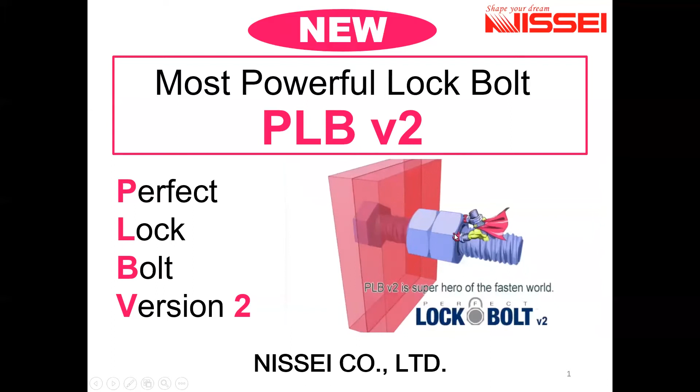Today, I would like to introduce our new lock bolt called the Perfect Lock Bolt V2 technology. The PLB V2, which I will explain here, has been developed by us for more than 15 years. By the end of this presentation, you will want to use it. My talk will be divided into 3 parts.

First of all, I'd like to give you some basic information about PLB V2 with examples of principal benefits. Then, I'm going to talk about the technical explanation of PLB V2. You will know that PLB V2 is the best lock bolt, demonstrating high locking and usability performance. Finally, I'm going to explain the PLB V2 business outline.

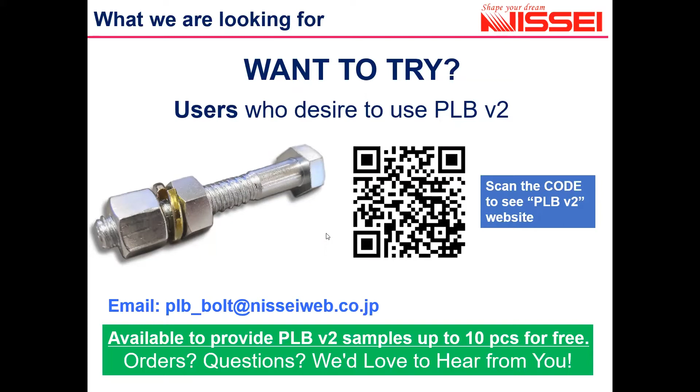Firstly, I explain the target we are looking for. We are looking for users who are interested in testing and demonstrating PLB V2. The PLB V2 project is still in its beginning period, having just started in September of last year. As I'll explain later, we are confident that PLB V2 is an anti-loosening product that meets all users' requirements. However, it still lacks recognition, and there are few examples of actual use.

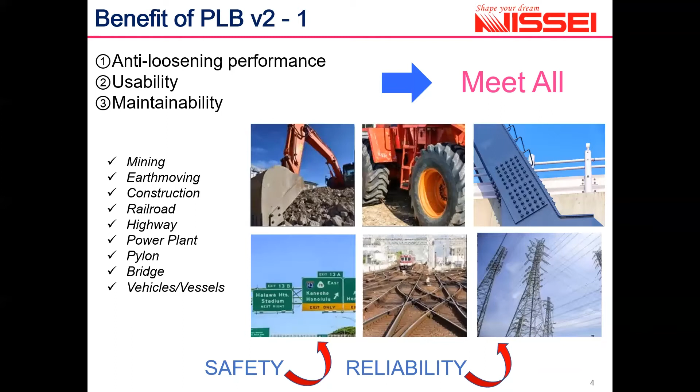The application range of PLB V2 is very wide, and we believe that it is especially suitable for areas subject to high vibration and requiring frequent retightening. The use of PLB V2 contributes to safety and reliability.

Next, I explain the actual usage of PLB V2 in Japan. PLB V2 is used for the parts of the preheater of a lime furnace rotary kiln in a mine. In the conventional method, a nut is inserted through a bolt. The nut and part are welded together to fix the part.

The bolts are made of heat-resistant stainless steel, used in high-temperature environments. The problem is that small gaps are created between the parts during the welding process, and harmful gases produced during the lime burning process enter the gaps. As a result, the bolt became thin and corroded, and the user had trouble with loosening 6 months after setting, and the bolts had to be cut to remove them, which required many costs.

The user has used the PLB V2 for 6 months now and it has not loosened at all. With the conventional method, loosening occurred in the same situation. It is also very important to realize that the PLB V2 material is cheaper and has less heat resistance than the material used in the conventional method. In summary, the user can reduce not only labor cost, but also material cost.

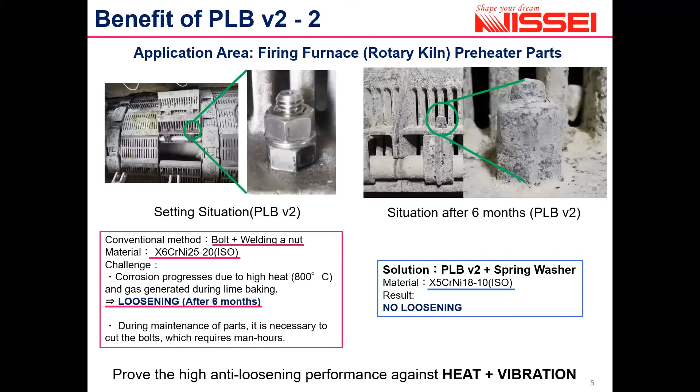I explained the principle of PLB V2. The PLB V2 has been designed to address the issues associated with self-loosening of a bolted joint. By design, the PLB V2 consists of a dual-thread screw shaft and 2 nuts of different thread pitches. The first, or big ring nut, on the shaft is a multiple thread nut. The outer, or secondary nut, on the shaft is a single thread nut.

When the PLB V2 is subjected to a self-loosening force in any form, such as vibration, as with double nut assembly, a self-loosening force initializes loosening with the inner nut. With the PLB V2, the inner nut advance is blocked by the slower moving outer nut. The mechanical lock is the secret to the PLB V2 locking design. No other fastener system in the world can make this offer. Most other self-loosening kits use friction for their locking function despite its uncertainty. PLB V2 locks the nut with a mechanical locking system that prevents them from loosening.

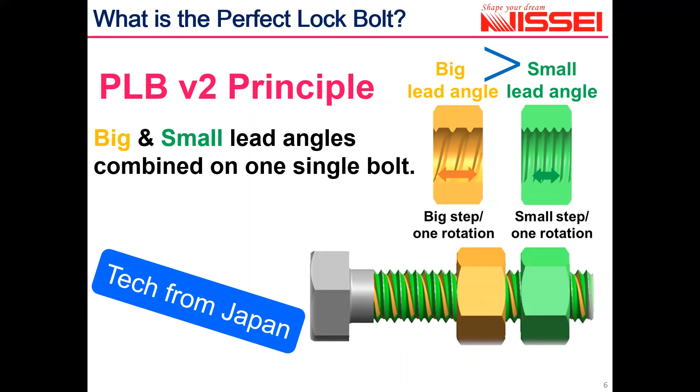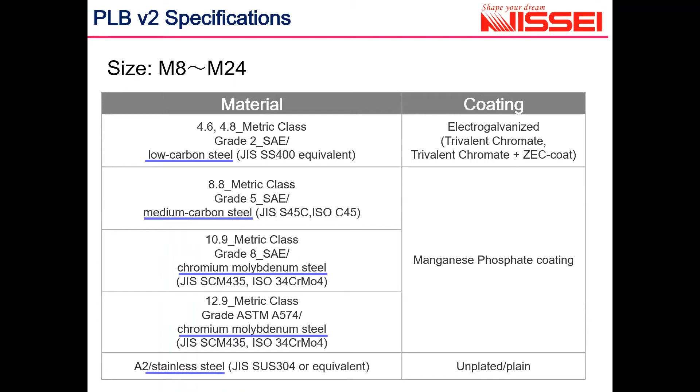This section explains the standard size, materials, and surface treatment available for PLB V2. The size range is M8 to M24, and the standard materials and hardness listed in the table can be used, for example, low carbon steel, medium carbon steel, chromium molybdenum steel, and stainless steel. PLB V2 doesn't apply to hot dip galvanizing because it has not been tested yet. However, ZEC-coat, which has equivalent corrosion resistance, can be provided for areas requiring corrosion resistance. We will consider materials not listed in the above table if requested. As a basic principle, if thread rolling process is possible, then PLB V2 can be made from that material.

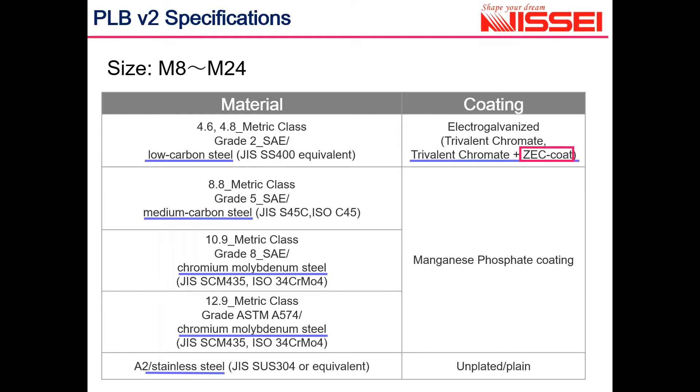From this part, I explain the technical information on PLB V2. Firstly, I explain the self-locking performance of PLB V2 and other locking kits. We prepared a video to evaluate the self-locking performance by using the Junker vibration test. I would be glad to see it.

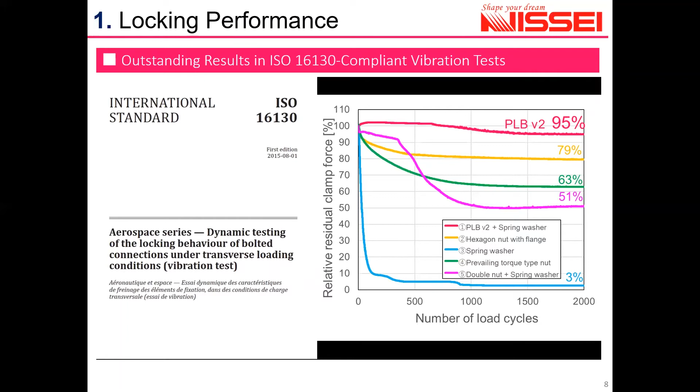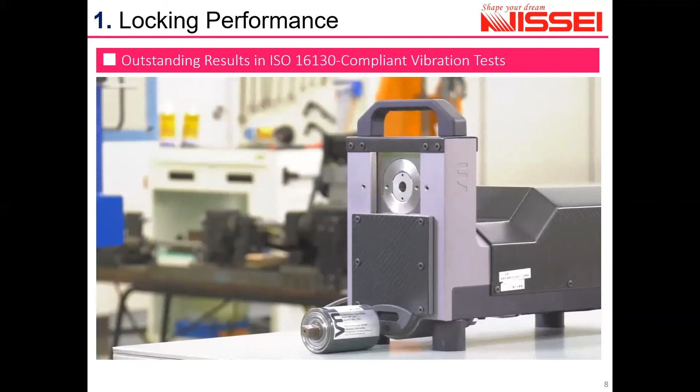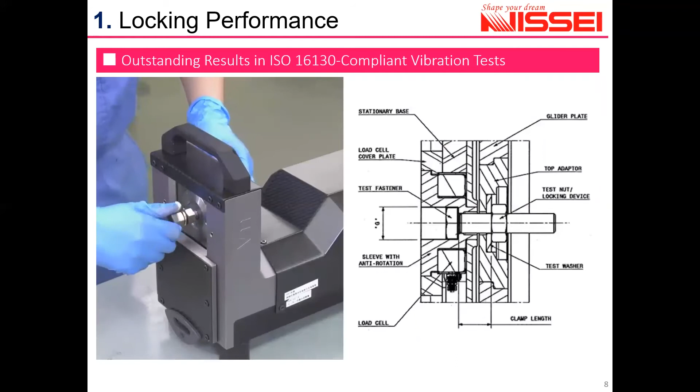A little explanation of performance testing. The Junker test, which conforms to ISO 16130 standards, validated PLB V2's claim to anti-loosening capability. It is the strictest test available. We used it to measure PLB V2's clamp performance.

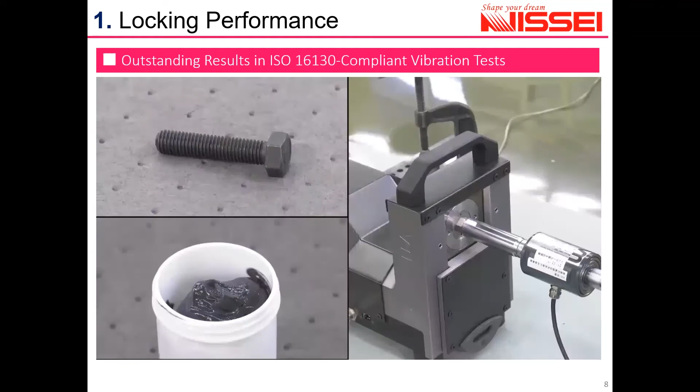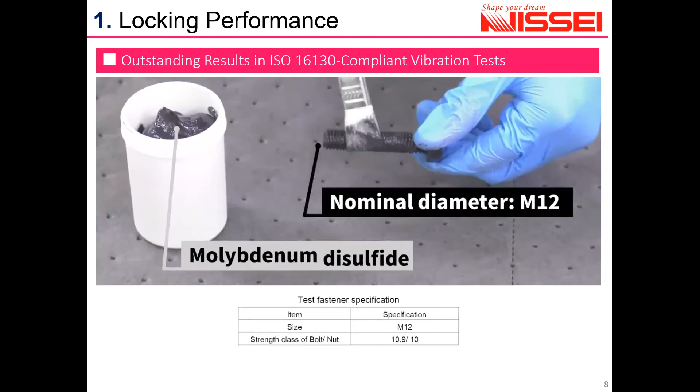Here you can see the actual test. Molybdenum grease is used to lubricate a bolt specimen with a nominal diameter M12, and the nuts are tightened. For easy observation, the bolt and nuts are marked. Then the bolt is subjected to 2,000 vibrations.

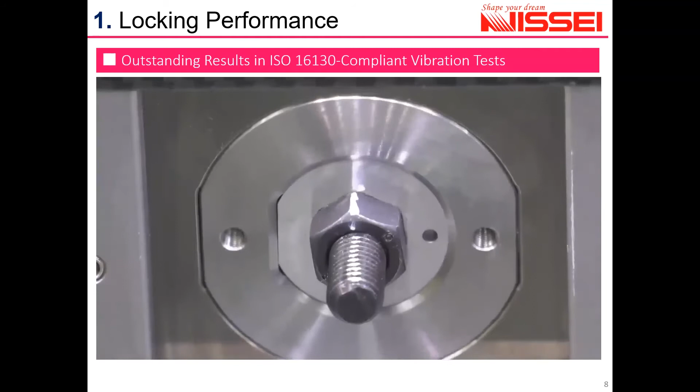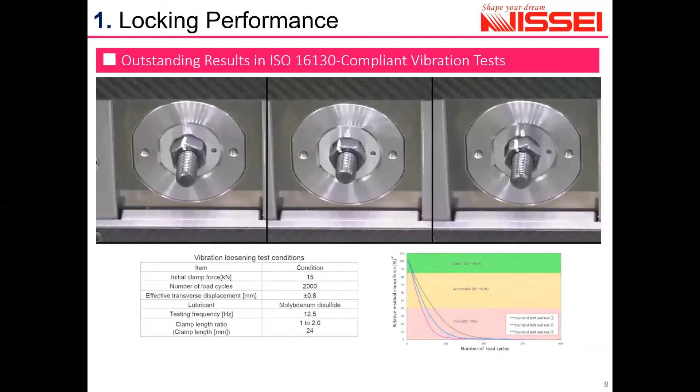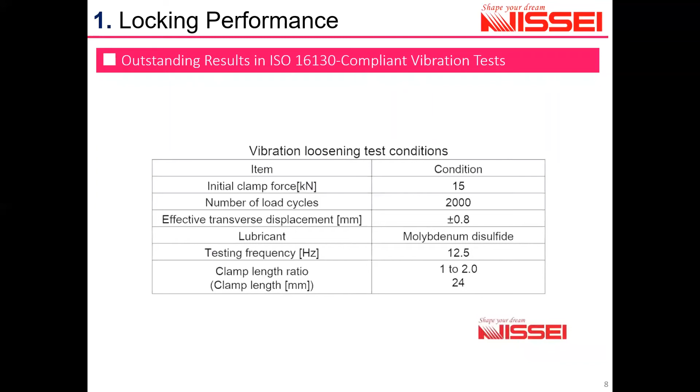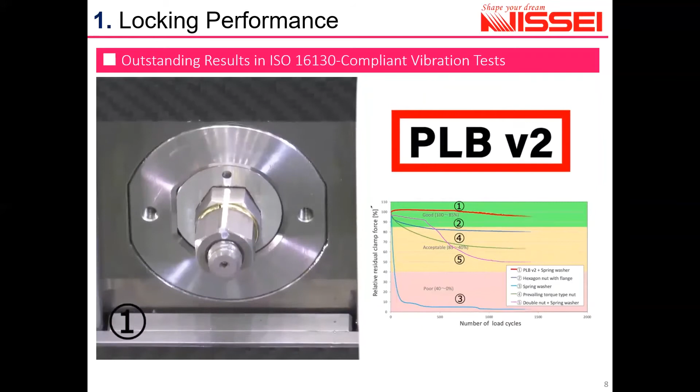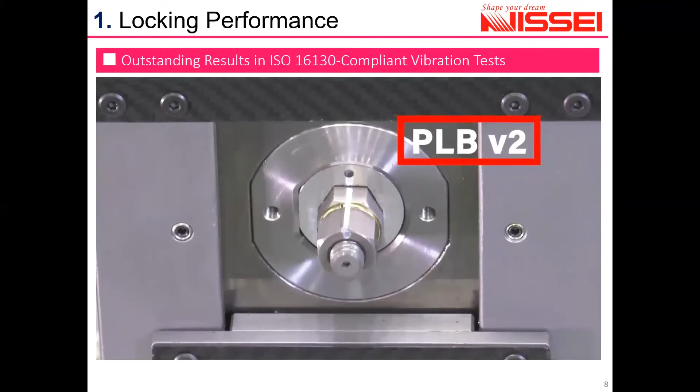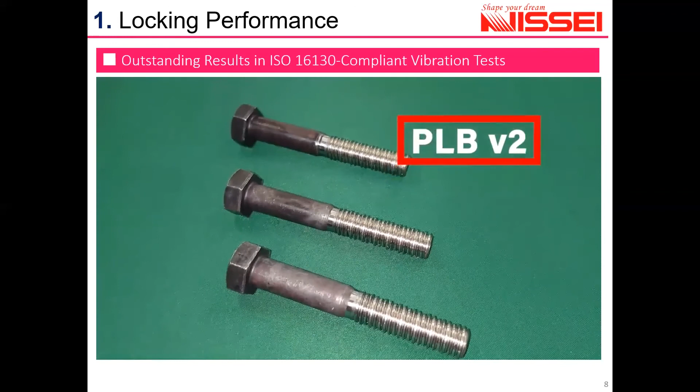Only PLB V2 attained the highest level of anti-loosening capability by ISO rules. This powerful level of anti-loosening capability delivers confidence. It delivers safety.

To evaluate the usability performance of PLB V2, I will explain the difference from the standard double nut. The standard double nut bolt has high self-locking performance, but it requires 3 steps for tightening, so time is needed. The tightening process has 3 steps: first, tightening the inner nut; next, tightening the outer nut; at last, holding the outer nut stationary and tightening the inner nut by rotating in reverse. The reversing process is not easy and requires a skilled technician to perform.

For the PLB V2, the inner nut rotates as it is being tightened because the inner nut thread is larger than the outer. This means the tightening process is complete by simply applying the specified tightening torque to the outer nut only. No reverse seating is necessary.

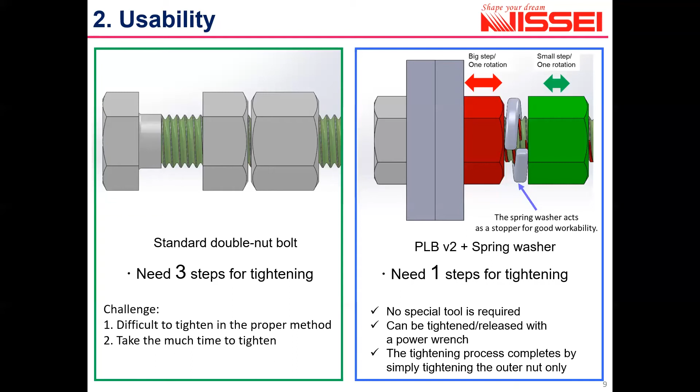In addition, the user cannot use some conventional self-locking products with a power tool for tightening and releasing. However, PLB V2 can be tightened and released with a power tool. In actual use, we recommend using a spring washer between the inner and outer nuts. The spring washer acts as a stopper and prevents the inner and outer nuts from turning together, enabling anyone to handle them easily and correctly. In conclusion, PLB V2 has superior usability performance compared to a standard double nut.

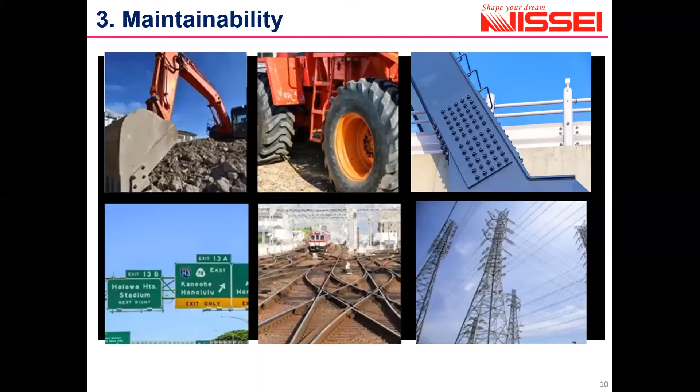Next, I explain the test to evaluate the maintenance performance. The purpose is to evaluate the combined results of lock and usability performance essential to users. We prepared a video to evaluate the self-locking performance by using the Junker vibration test. I will be glad to see it.

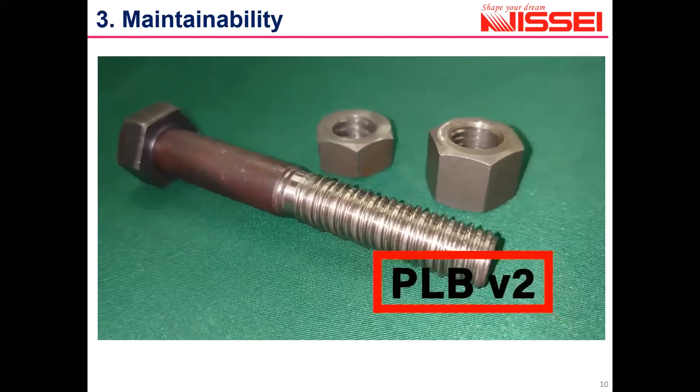Nissei has developed the anti-loosening bolt PLB V2. Its easy handling and unrivaled anti-loosening properties, plus lower maintenance costs, have been verified.

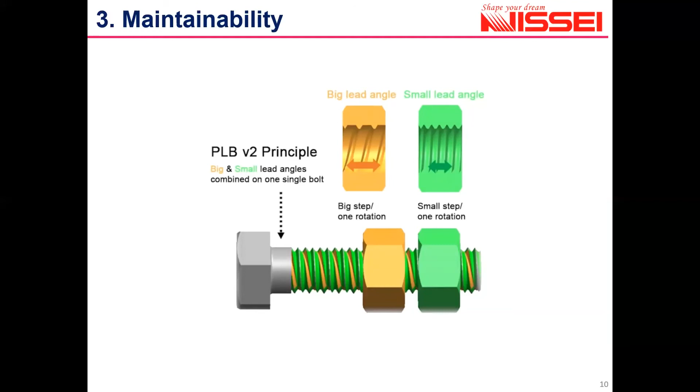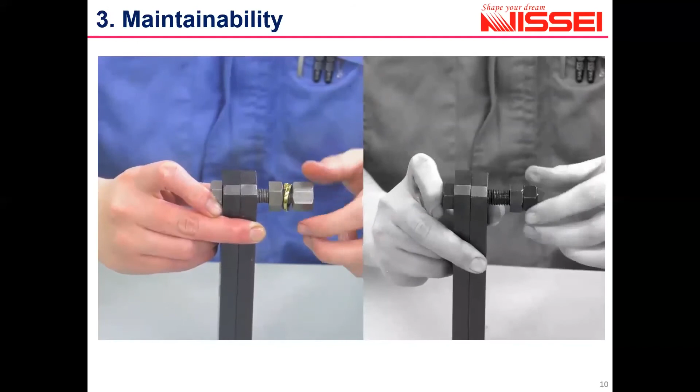Here, PLB V2's basic structure is illustrated. There are 2 nuts, and each moves along the shaft at a different speed. They can move apart or bump together. When the outer nut is tightened, the inner nut moves too.

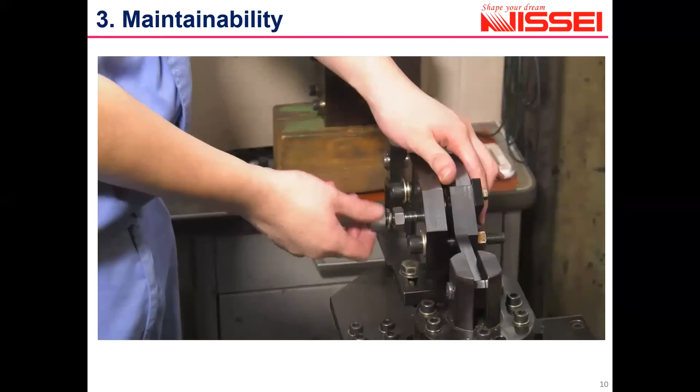This requires 1 action. When vibration begins, the inner nut presses against the outer nut and cannot loosen. It is blocked. PLB V2, compared to other highly evaluated products that must be tightened by hand, can be installed in an instant with ordinary power tools. Removal is fast: unfasten the outer nut and remove the inner nut by hand.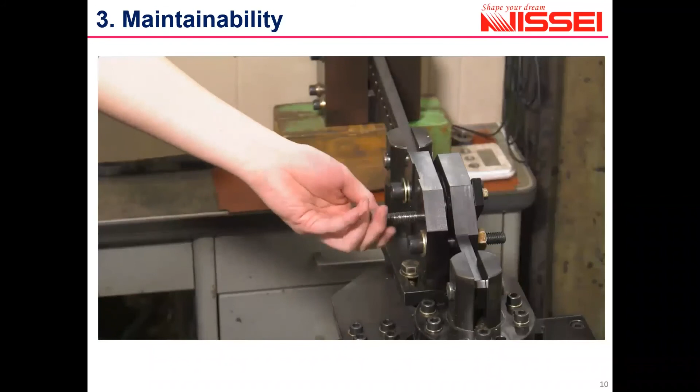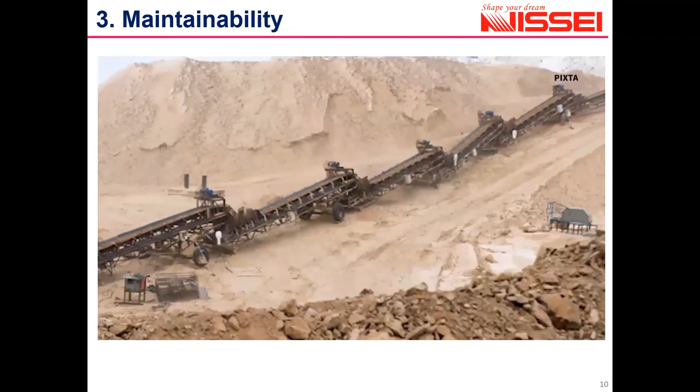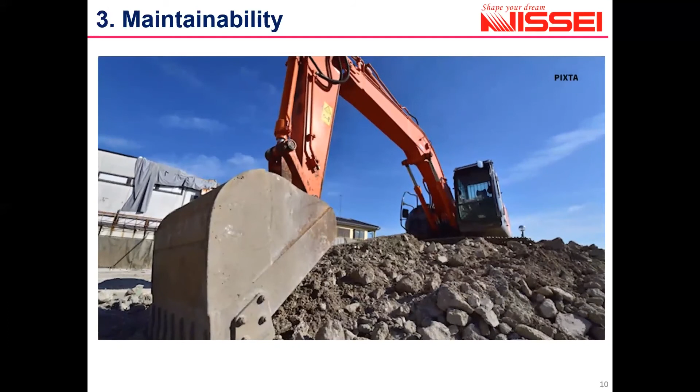Where heavy vibration occurs, such as with industrial machinery or transportation machinery, it is a fact that serious accidents can happen when bolts loosen. It is also well known that delays due to maintenance, that is, retightening bolts, are a problem. Nissei conducted an experiment to measure how costly maintenance can be. Here is how the experiment was conducted.

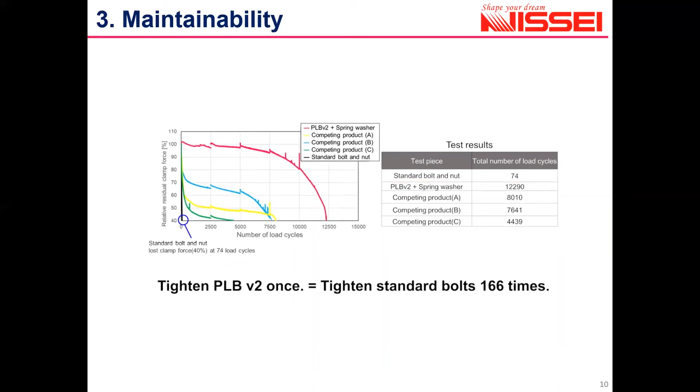The standard bolt loosened after 74 cycles, PLB V2 after 12,290 cycles, a ratio of 1 to 166. PLB saves 166 times the cost for each bolt to be tightened.

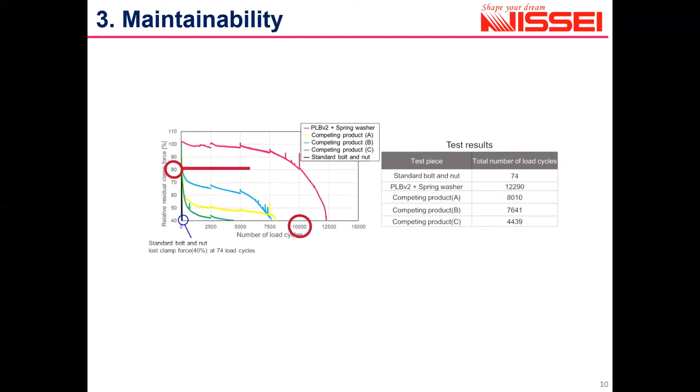Another test revealed that after 10,000 cycles of testing, PLB V2 maintained over 80% clamp force, placing it near the top of the ISO ranking, whereas other products lost clamp force after 2,500 cycles. Comparison testing substantiates PLB V2's claim to reduce maintenance costs.

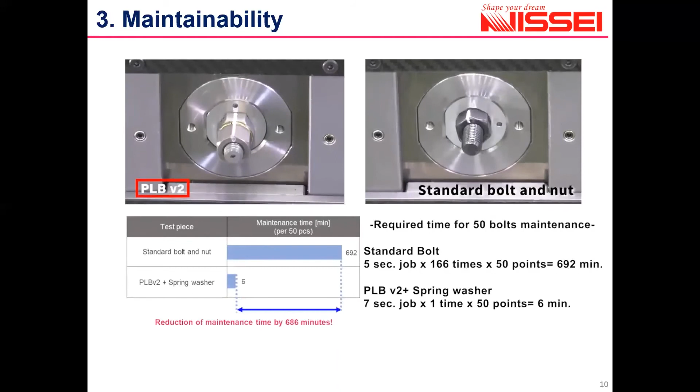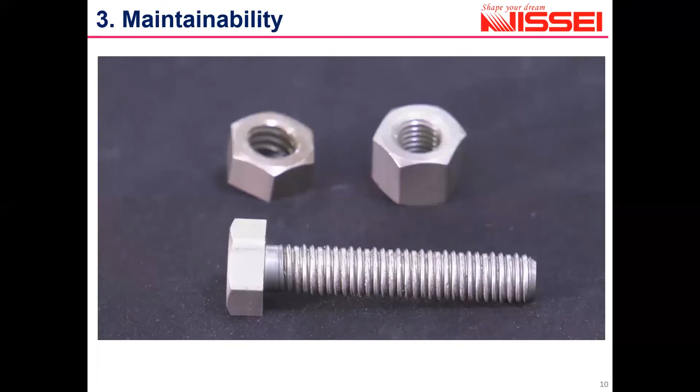In other words, more than a day of maintenance work can be done with PLB V2 in only 6 minutes. PLB V2 maintains clamp force longer with superior performance, reduces maintenance costs, and delivers confidence and safety.

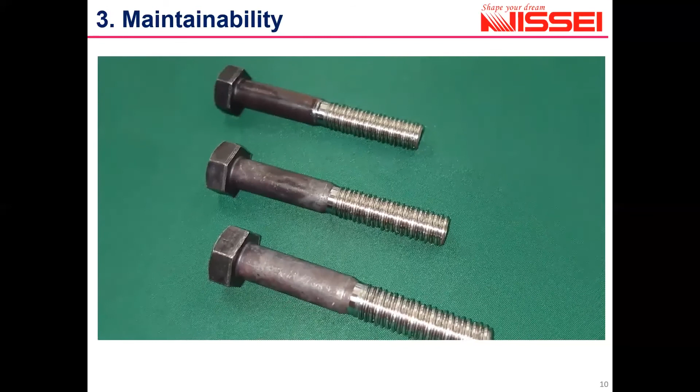Next, I would like to explain the outline of the PLB V2 licensing business. The PLB V2 licensing business provides manufacturing and selling rights to local bolt or parts manufacturers and distributors under the license agreement. The reason we adopted the licensing business model is because we are not a bolt manufacturer, but a manufacturer of cylindrical thread rolling machines.

We can manufacture and sell small quantities of 100 to 5,000 pieces, but we don't have a mass production and inspection system for tens of thousands. So we are using this type of business.

The PLB V2 business is mainly a licensing business, but we have received requests from users who would like to use it. Therefore, as an option, we are providing the PLB V2 for a range of 100 to 5,000 pieces. We have acquired intellectual property rights in various countries. For thread rolling dies, as an option, we can sell cylindrical, flat, and planetary thread rolling dies for PLB V2 production.

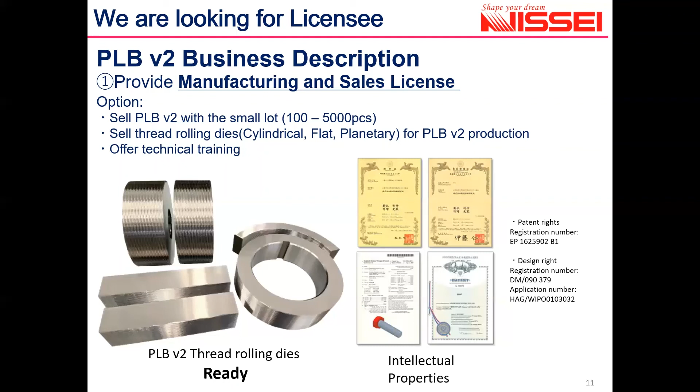Next, I will explain the benefits of the PLB V2 licensing business. The licensee doesn't need to develop thread rolling dies for PLB V2 production because we can sell PLB V2 thread rolling dies matching your rolling machines as an option. This means there is no need for new machines to be introduced to produce PLB V2, so the licensee can save on initial costs.

The manufacturing procedure for PLB V2 can follow the same way as standard bolts and nuts. For the bolt, PLB V2 can be produced simply by changing dies at the threading procedure. For the nut, the multi-pile thread nut requires custom-made taps for manufacturing; however, existing tap manufacturers can produce PLB V2 taps without problem.

As an option, we also offer technical training. In conclusion, the licensee can profit by manufacturing and producing this high value added product without new production facility investment.

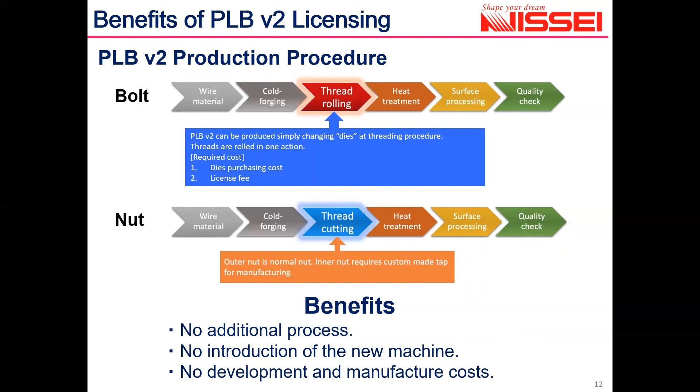Finally, I explain Nissei. We, Nissei, are the leading manufacturer of cylindrical thread rolling machines in Japan and have the world's most advanced thread rolling technology. We started manufacturing thread rolling machines in 1955 and continue producing them. Products shown are examples manufactured through our thread rolling processes.

The picture is one of our latest thread rolling machines called the Z-Comet, which finishes the tooth flank of gears to very high precision using thread rolling. As I explained, we are experts in thread rolling. With this experience and technology, we can develop self-locking products with ingenious bolt designs not commonly found in conventional products.

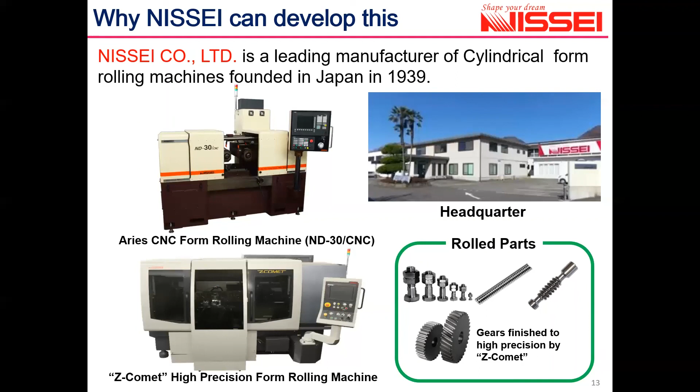At last, I show you the latest news about PLB V2. The PLB V2 was awarded the Technology Development Award by JSTP in 2021. Again, we are convinced that the PLB V2 is the best self-locking product with high technology.